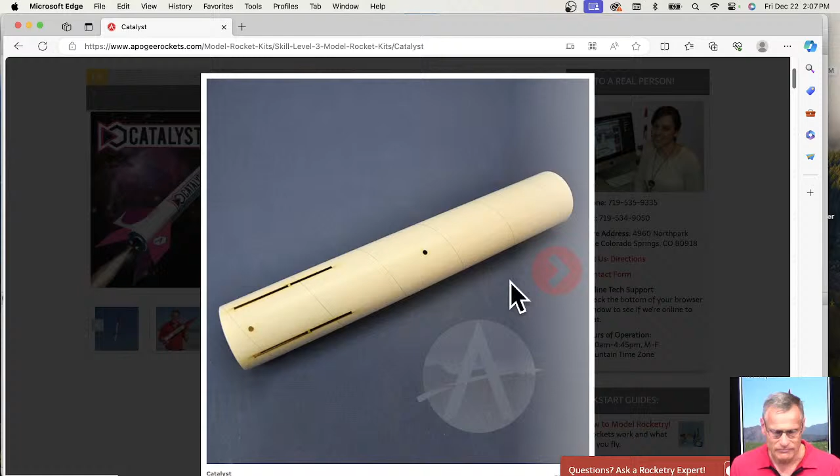So that's what it looks like when it's all packed up. There's the parachute, there's the tube, and you can see it's got a split fin tab. And you're probably wondering, can I do a split fin tab in RockSim? And the answer is no. That we've never thought about before.

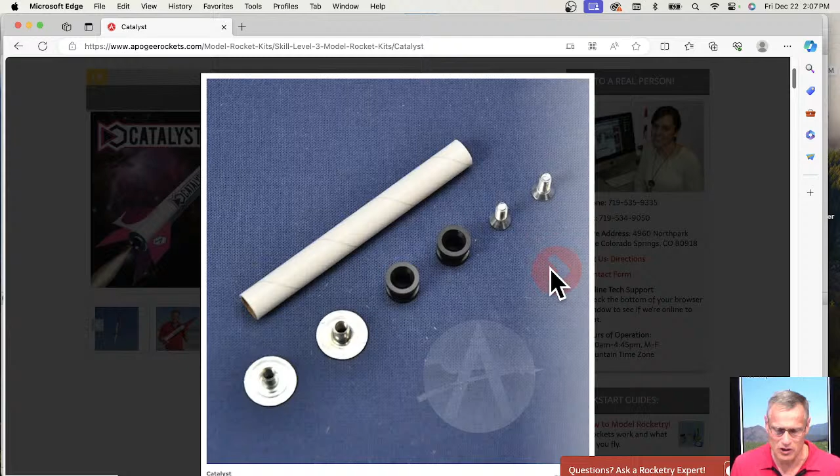It also does come with a launch lug in case you don't have a launch rail. You can fly it off of a 1/4-inch launch pad. There's the fins. They are plywood.

What else? There's a 3-inch diameter nose cone. There's the parachute and the parachute protector, the instructions, and there's the centering ring installation jig. And it also has vinyl decals. Yeah, so that's what the Catalyst looks like.

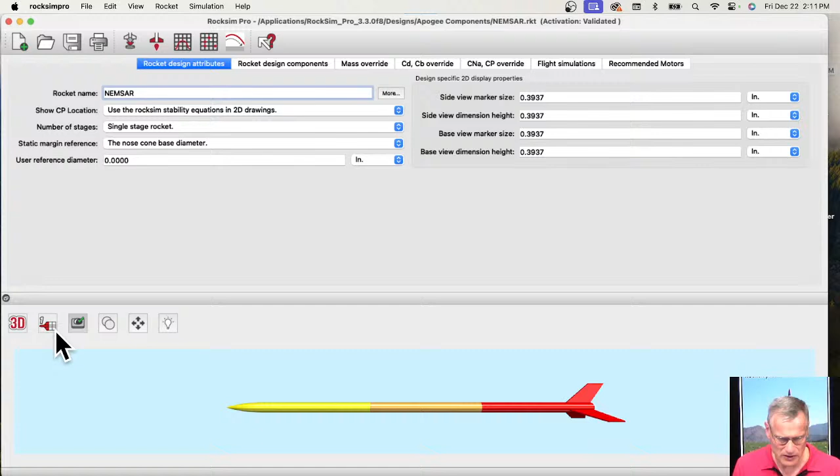Oops, what happened? Open. I must have clicked cancel or something. There it is. Okay, so here's the rocket. And if I click over here on this side, and if I go to a side view, I can get the diameter. So the diameter is 1.18 inches.

So his question is, will it allow me to indicate the upscale size? And the answer is yes. So let's do a 2x upscale. Basically we're going to double the size. So the diameter, we want to go from 1.18 inches to 2.36 inches, and that would be a 2x upscale.

To do that, it is really simple, although there are some caveats, and I'll explain those in just a second. So we're going to go to the rocket menu, and we'll come down here under scale, and we're going to choose by scale factor. Right now it's set to scale by 1, and we're just going to change that to a 2 and click OK. And boom, we are now at a 2x scale. So we went from 1.18 inches to 2.36 with just a click of a button.

Okay, so now let's talk about the caveats. So what didn't get scaled? Basically the outside of the rocket got scaled, but the inside parts might not have gotten scaled.

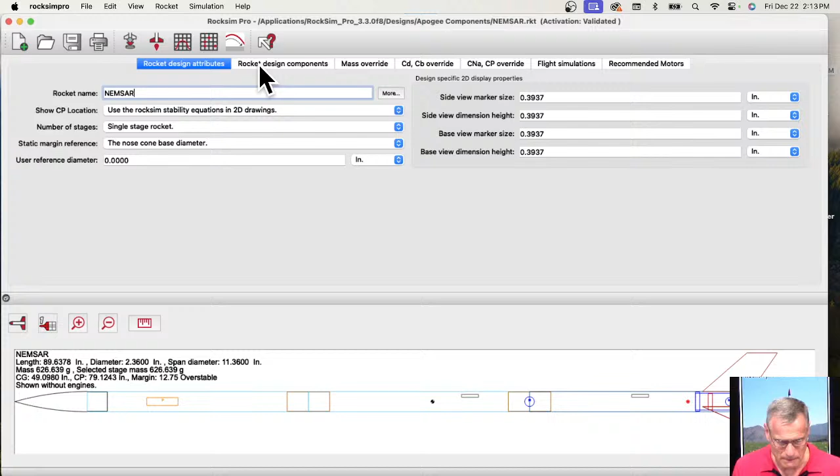Let's go to the design components and let me show you. Let's go to this coupler right here. This is a tube coupler, and previously it was a 29 millimeter diameter tube coupler.

So if we open that up, it did upscale the outside diameter and the inside diameter. But here's the issue with body tubes: when you go from like a 1x to a 2x in size, what doesn't usually happen is the wall thickness on the available tubes. Not in RockSim, but in real life, the available tubes don't increase as well.

So let me give you an example. Let's go back to the Apogee website, and let's go to shopping, to building supplies, to body tubes. There will be a chart down here if I scroll down far enough.

Let's go to 29 to 54. Okay, so we're going to start with a 29. This tube right here, I can tell you from experience, because I know the NEMSAR kit was based on this 29 millimeter body tube. So on this page, here is that 2913 body tube.

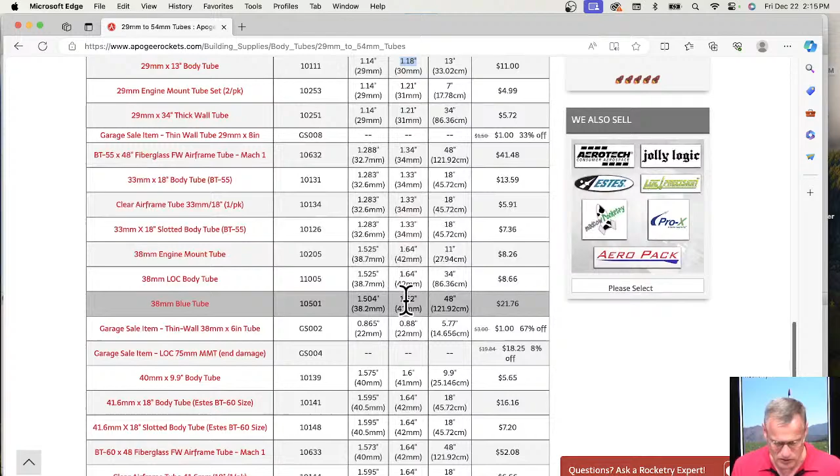I'm going to have to scroll down here, just looking down in this column. So the biggest one that I have, that's closest, is this one right here, at 2.26. But my inside diameter is 2.31.

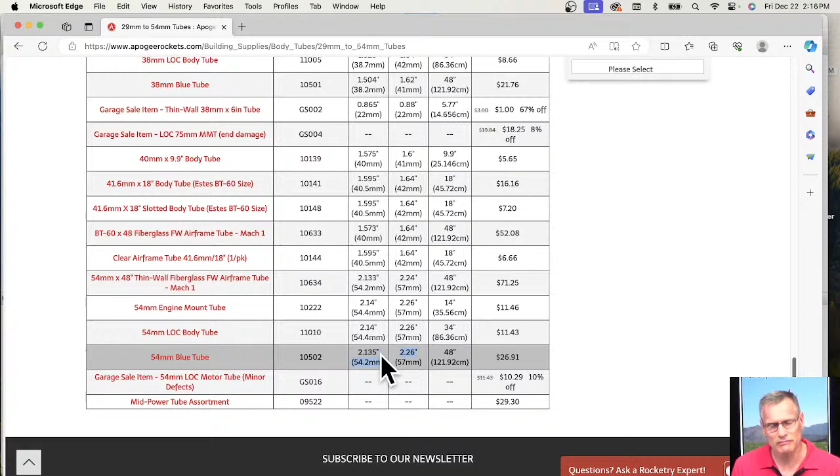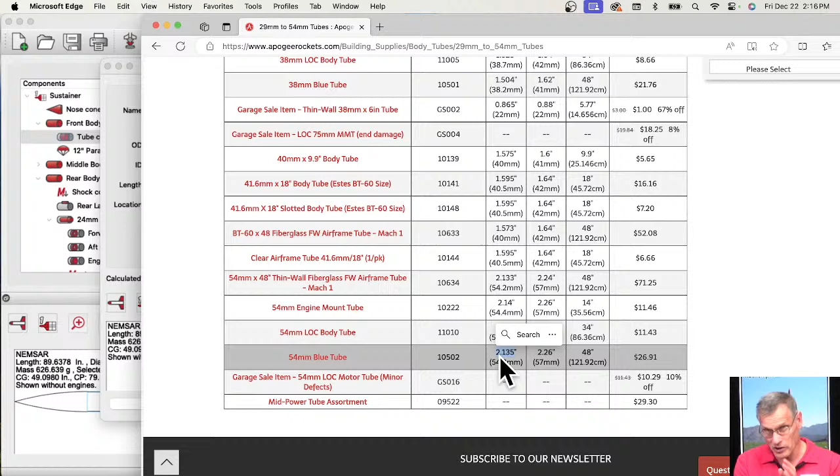And remember we said if we double the outside diameter of the tube coupler, which was, I forgot what it was, 2.26, will that fit in this available tube? So this is where it gets hard, because now you have to adjust tubes to what's available.

So when you scale, you're just scaling everything. But when you actually go to buy components, the components are not going to be at those exact diameters that you want. So basically what you have to do is come back to each component inside the rocket and tweak the diameters. It takes time, but you got to do it. There's really no way around it, because RockSim isn't smart enough to think about what components fit together.

This is where people always ask, is there a use for AI in rocketry? And this would be a really good place for AI: scaling rockets. Because when you scale up your rocket in RockSim, you then have to go buy the components, and you need everything to match. If there was an artificial intelligence, what it does is make decisions for you. You have a collection of tubes, and you want to scale up, and what we'd like the AI to do is pick all the right tubes for us. We're not there yet.

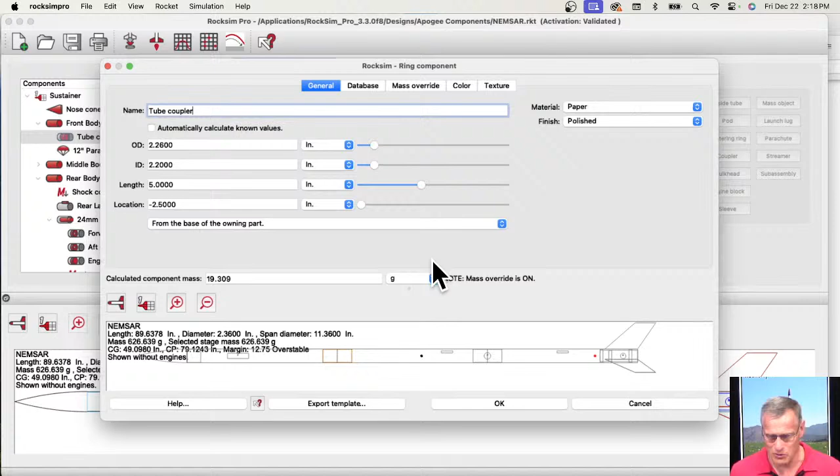And when is that going to be? I'm not an expert in artificial intelligence, so I couldn't tell you. So, save my changes, no. That answers Jim Hammond's question about how to upscale a rocket. It's easy to upscale, but you do have to come back and tweak some of the internal components.

Jim Hammond says he's retired, that's why he's here. Fat Bang says hello from Texas. John Sullivan is here, watching from Belleville, Illinois, which I think is near St. Louis, Missouri. Space is Cool says, I came back from school. Cool, welcome home.

Space is Cool says, I don't have my L1, so how can I use that? What do you mean by that? A 29 or 38 millimeter motor mount. So he's probably talking about our scale question: what is the motor mount in here?

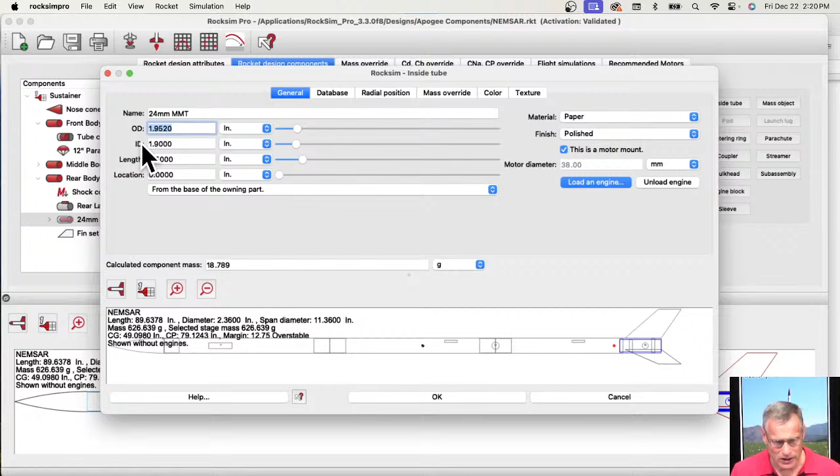So when we doubled the size of this motor mount, previously it was 24 millimeters. If I click on that tube and look at it, now we have a diameter of 1.95 inches. A 29 millimeter motor mount would be 1.14. So when it doubled the size of the motor mount from a 24, it almost went to 2 inches, so it's between a 38 and a 54 millimeter diameter motor mount.

Diameter, scroll down, and keep scrolling.

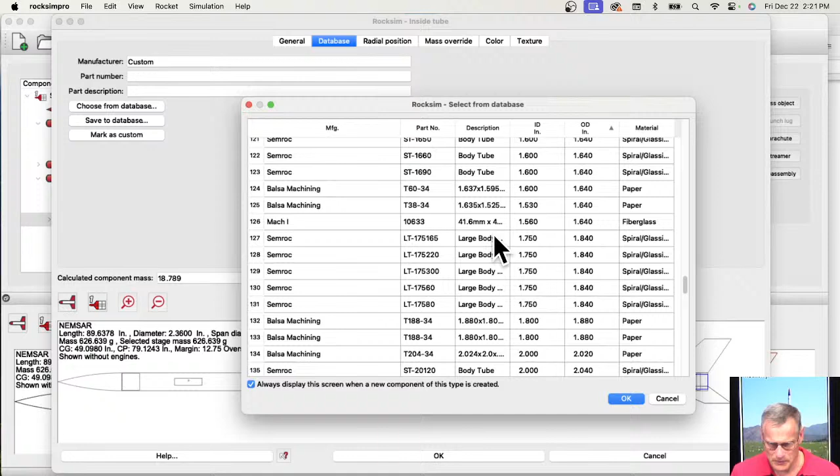See, here's a 54 millimeter diameter tube, and it has an outside diameter of 2.26. And the 38, here's a 38 motor mount tube, and it has an outside diameter of 1.64. So the one back here was 1.9 inches, which is greater than a 38, but less than the 54.

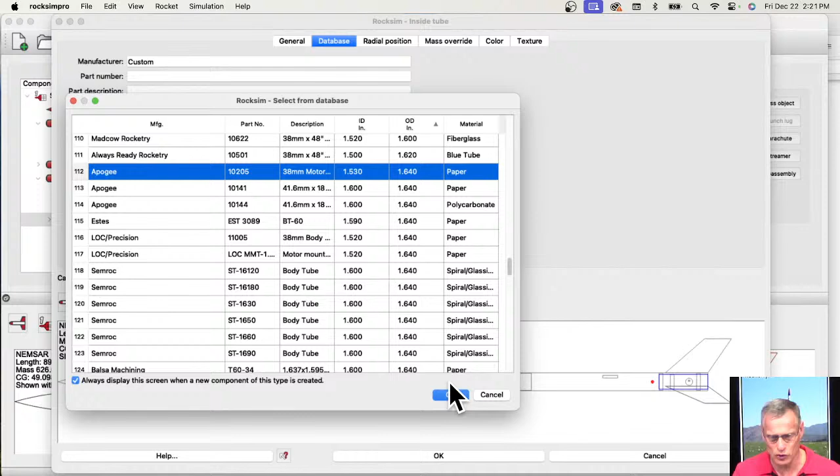So I would say we would probably turn this rocket into a 38 millimeter motor, and so I would select that. So that's the tube. Let's click OK. And you can see it threw it in there.

And if you look at the back, to zoom in, what I did, I just used the scroll wheel on my mouse. You can zoom in and out, and then click and drag so you can see this better.

So previously, I think this ring right there was an engine block, and this was a centering ring, and that's a centering ring. So we would need to move that centering ring forward and then just check that the inside diameter matches the outside diameter of this tube. And that's real easy to do.

So you just click OK, so it put in a new motor mount tube, and it's no longer a 24. Now it's a 38. So if I click the down caret right here, it will show me the components that are inside. So here's the forward centering ring.

And we want to check this box right here that says automatically calculate the known values. So we're going to click on that, and that will, if I look at it, put it on the inside. I wanted to put it on the outside.

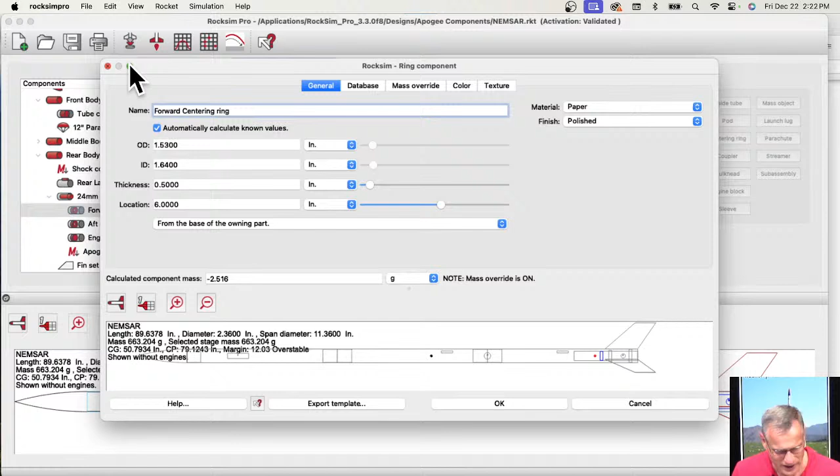That's interesting. I would probably have to delete that centering ring and add it back. So let's do that, because it's on the inside of the tube and we need it to be on the outside.

So I'm going to highlight that tube and then hit delete. It's going to ask you, do I want to delete it? So I'm going to say yes. And okay, so that was the motor mount tube.

I can either put the new centering ring on this body tube right here, which I probably should do, or the motor mount tube. But if I attach it to that motor mount tube, it might put it on the inside again. So let's put it on the outside and come here to centering ring.

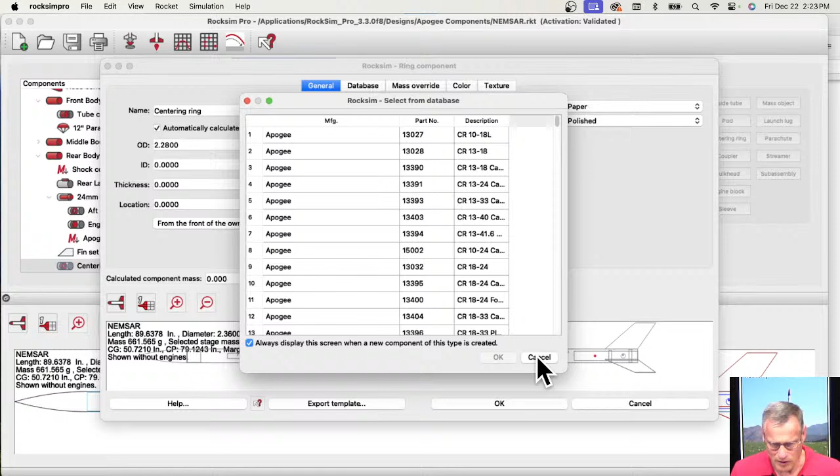And I'm going to ignore the database. So here's our centering ring, and you can see this blue line right here. That's where the centering ring is right now.

I need to give it some thickness so you can see it, so let's call it 0.25 inches. So there it is, I made it larger. And I need to slide it back here, so I'm just going to change the location.

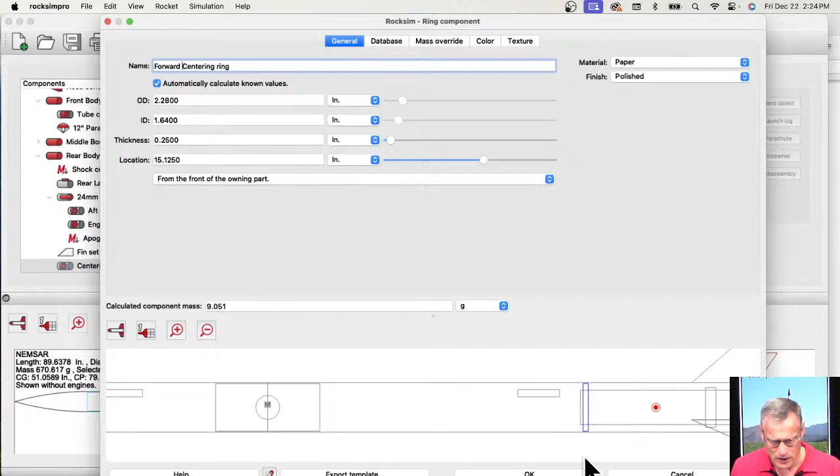So now watch this inside diameter right here as I slide this ring over the top of the tube. So I'm getting close, boom - so it automatically adjusted that centering ring for me, so I didn't have to adjust it. So then I'm going to say this is the forward centering ring. Click OK. So now we got one ring.

I'm going to have to do the same thing on this back one. So let's delete it. I highlight it, then I right click on it, hit delete. It should go away.

And I'm going to just take this centering ring right here and duplicate it. So to duplicate it, again, right click and do a copy, and then come up here to the body tube and paste. And it pasted it right on top.

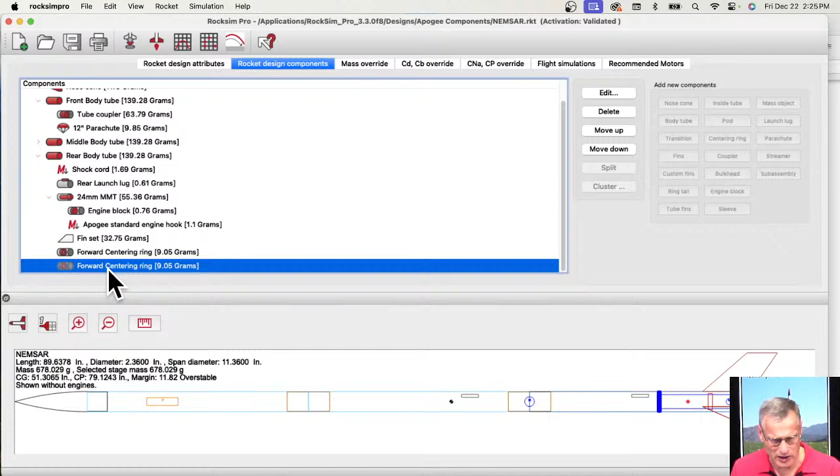So now I need to edit that part. I'm going to call this the aft ring, and the only thing I'm going to do is just keep sliding it back to the back end of the tube, right about maybe there. So you can see it right there at the back end of the tube.

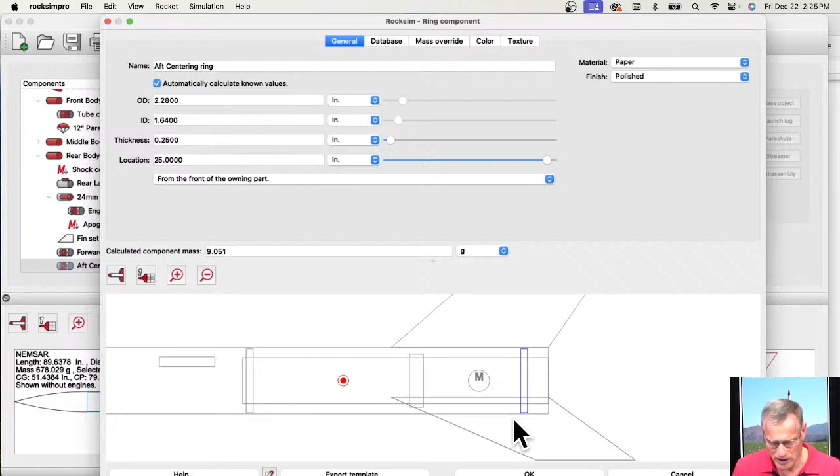Now this right here was an engine block, and since this is a high power rocket, we're probably not going to need an engine block. So I'm just going to delete that entirely. Highlight it, then come down here and delete, or you can do a cut and say yes.

Okay, so that's how I did it. Just tweaking the components to what is actually available. Although in real life, this 2-inch or 2.3-inch diameter tube is not really available, so these are all custom parts. Okay, so I got off track.

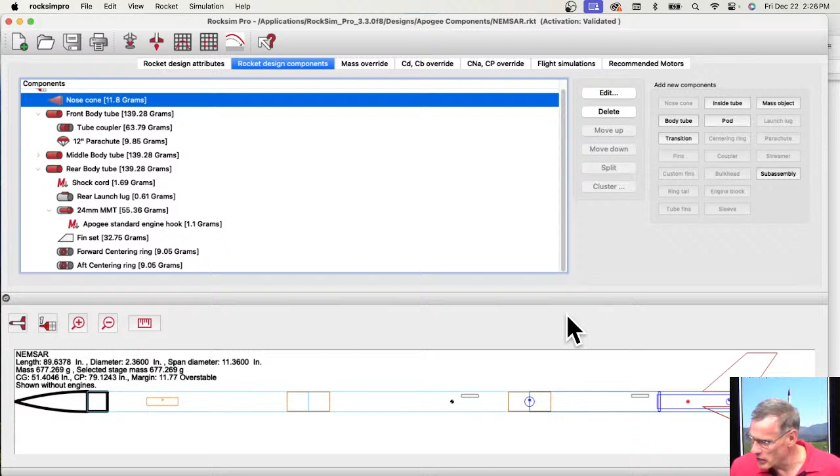Jeff Gortowski says hi from waterlogged Los Angeles. Yeah, I hear you guys are getting some water there. I hope it washes out to the sea really quick, and maybe it washes out all the debris too.

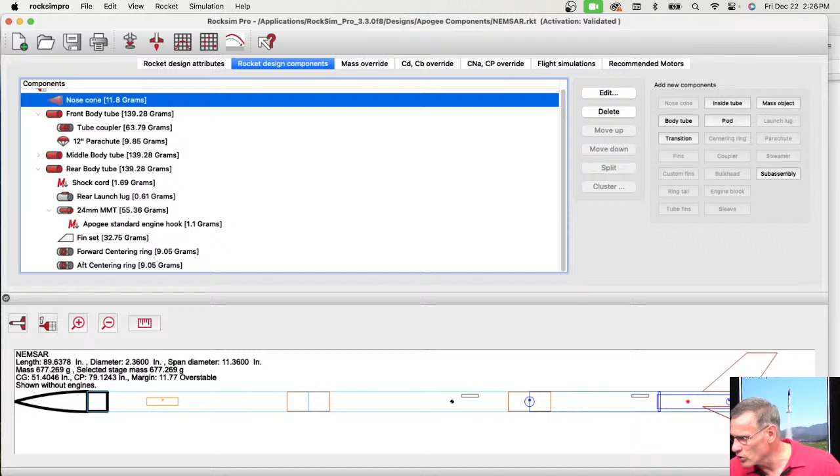Chuck Garn asks, will nose weight be required for the catalyst? The answer is no, no nose weight is required, even with an H motor. That rocket has a really long nose cone made out of plastic, so it's a little bit heavier, and that will move the center of gravity far enough forward where you don't need it. I think I have a catalyst RockSim file, so I'm going to go open that.

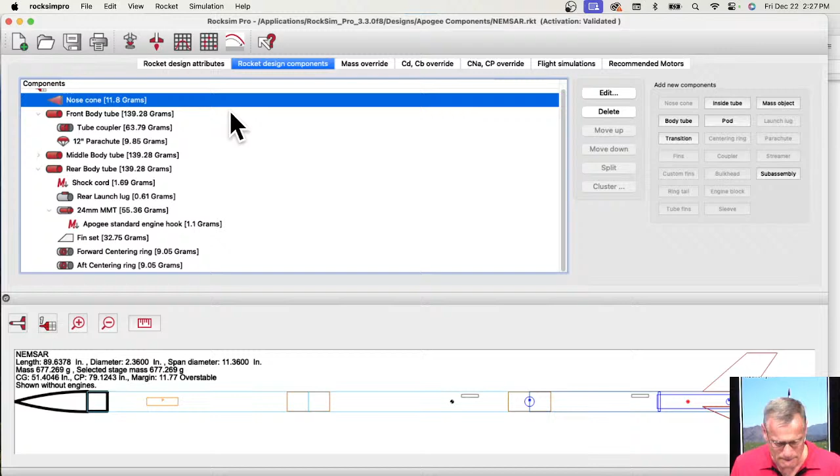File, open. What did I do with that? I'm looking in the wrong spot. RockSim Designs, and date modified, there it is, catalyst. Open. Save my changes? No. Hopefully it opens, this one has some textures on it, and that can make it take a little longer to load.

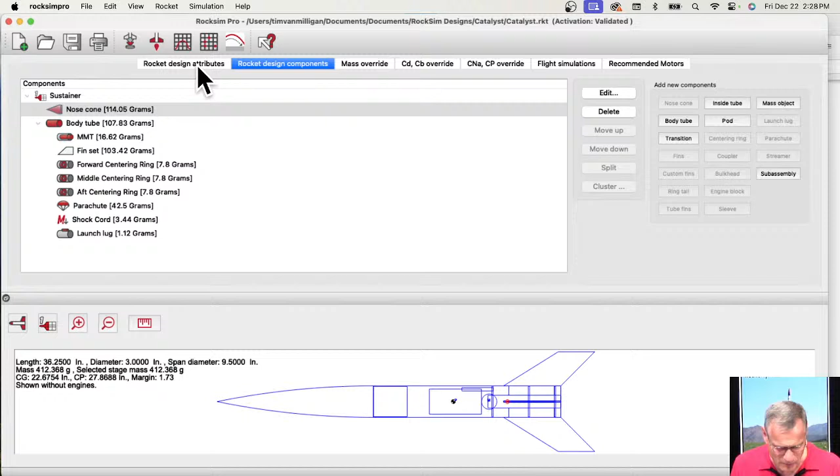In fact, my textures I can see already are backwards. So this is the RockSim file for the catalyst. My fin textures, the decals, are backwards. But I wanted to show you, this doesn't have a name, there we go, add the name. You can see here's our center of gravity, and here's the center of pressure.

Let's load in a big rocket motor, choose an engine. Let's go like an H135, that's kind of a mid-range. Let's make it a 14, it has an overhang of 0.5 inches, click OK. Click OK. So you can see here's my center of gravity, here's my center of pressure, and there's still no nose weight up here.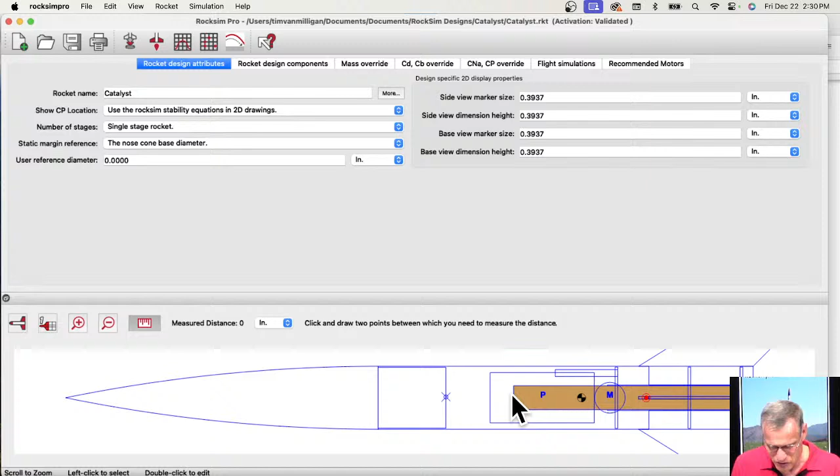But the problem is we've only got this much room right here from the front of the motor to the back of the nose cone for our parachute. And I'm using RockSim Pro, which has a measure feature, so I can click from here to here, and it tells me I got 3.25 inches for my parachute. And that's, you're probably going to scorch your parachute.

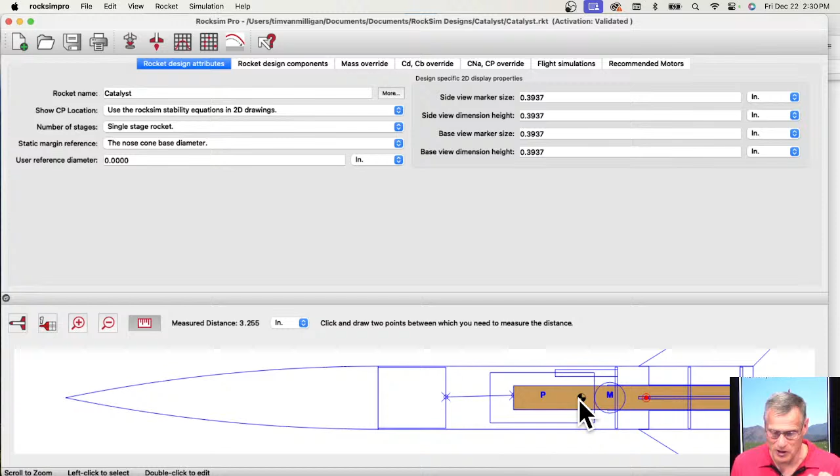Although you probably could wrap it around the outside of the motor. But even with a long motor, our center of gravity is still okay on the catalyst because it's got this big heavy nose cone, and it's short, so those long motors are actually going to move the center of gravity forward, which makes it more stable, because we have part of the motor in here that is in front of the center of gravity. Okay, so that's a good question.

Carlos McCauley is here from Palm Bay, Florida. That used to be my old stomping grounds when I lived in Cape Canaveral. Didn't know Palm Bay is where FIT is, right? I went to FIT, but not to that campus.

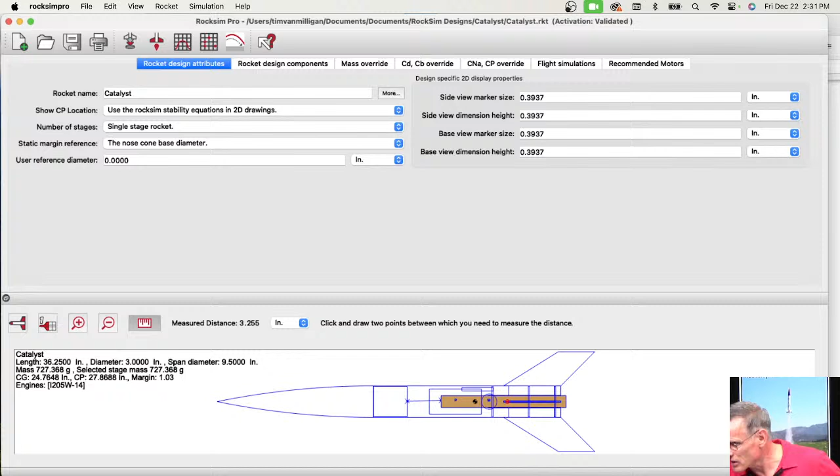Maximo says, can you make the Hermes HLV on the sim, and the Hermes, it's a cargo? Okay, so let's open up a Hermes. And let me go back to here. So here's a Hermes. This one also has a lot of textures on it, so it's going to take a little bit longer to open. Save my changes? No.

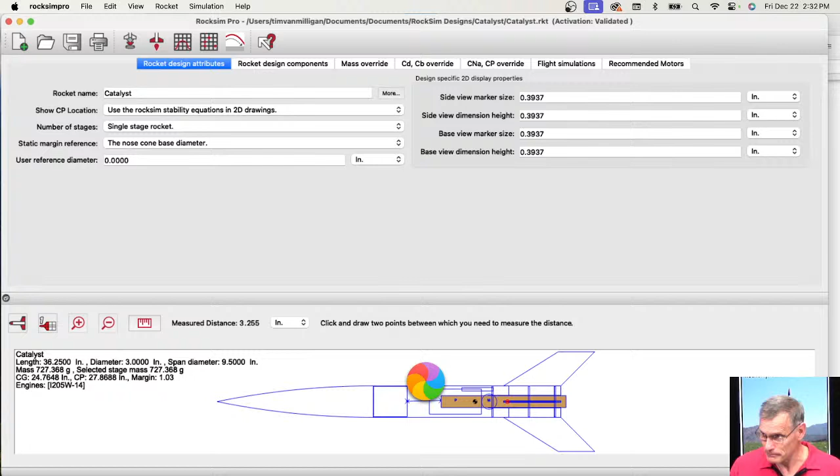My computer right now, because I'm running RockSim and I'm running the streaming software, it's bogging down, I can hear the fan going. Okay, so this is the Hermes. Come on, I'm waiting for it to catch up, there it is. Okay.

So the question is, can you make the Hermes HLV on the sim, and the Hermes it's a cargo? Well, I'm not sure what he means by making it a cargo, because it's already set up, the rocket is already set up with a payload bay here in the front. So let me go to the side view. This right here, I can put cargo inside of here.

So if I zoom in, I can measure again, from here to here, come on. Click on 2 points, here to here. Okay, what's going on? Why is it not letting me measure? It's kind of stuck.

Yeah, okay then, I should be able to click. Oh boy, it looks like my fins went crazy back here. But anyway, this is a BT60 tube, so that's 1.63 inches that way. So I'm thinking that's probably about 7 inches from here to here that I have room to put cargo, and cargo could be anything.

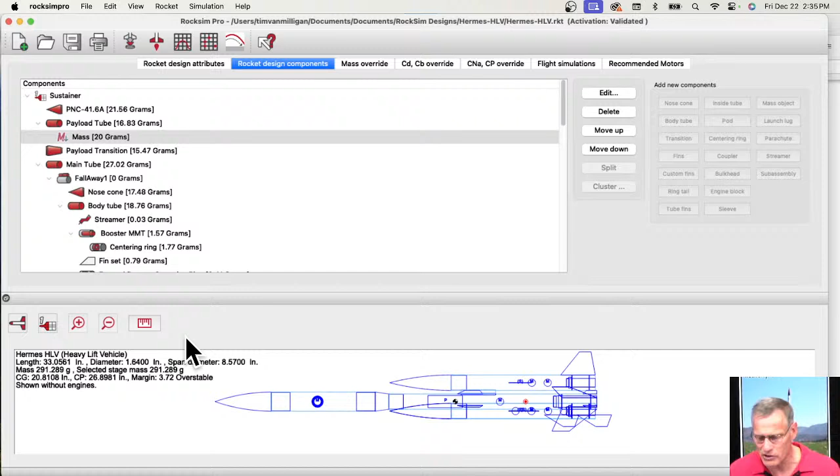So when you scale a rocket up, everything goes up by 2x. And that's the advantage of that feature.

Let me try a different design here that's simpler. Something simple, something simple. I'm going to try this one, two-stager Loadstar.

Save my changes? No. Okay, so right now, if I scale this rocket right here, we've got a diameter of 1.32, and also look at the span diameter. The span diameter is 8.73 inches. So that's from here.

That's kind of like looking at it at the bottom, as if it was a circle drawn around the fins. That would be the diameter.

So when you scale the rocket, the length is going to double, the diameter is going to double, and the span diameter is going to double.

So let's do that again. Rocket scale factor by factor of 2. Click OK, and boom, you see that the span diameter also doubled. So basically, the fins doubled in size, and that's the way you would expect it to work.

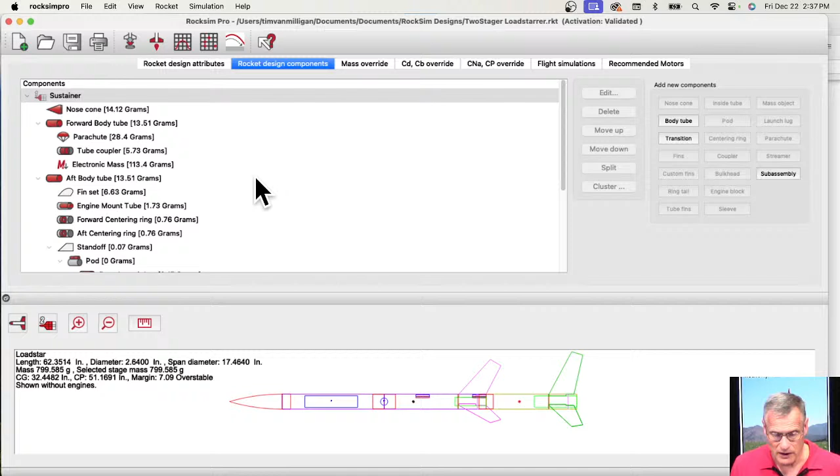Now, if you can actually scale the fins as well. Let's open a new design again. I want something that's fairly small.

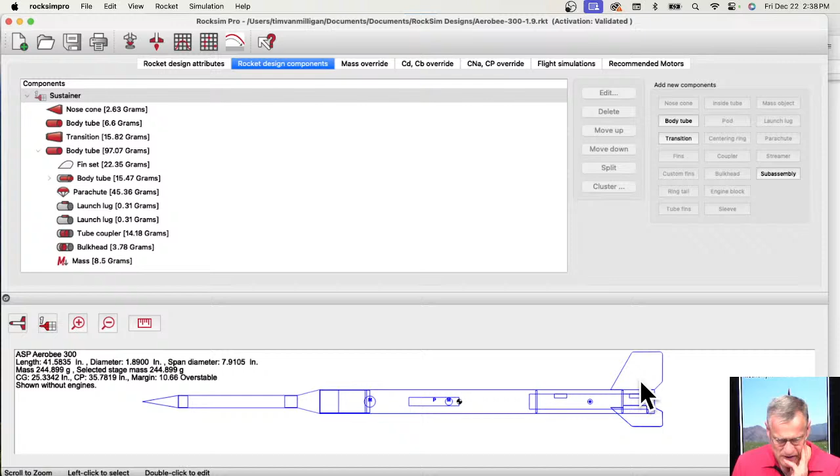Let's go with this Aerobee 300, 1.9 inch. Okay, so here's these fins, and they have a span diameter of 7.9 inches.

There's another feature in RockSim. So I can go to the fins, and I think if I go to plan points, this button right here.

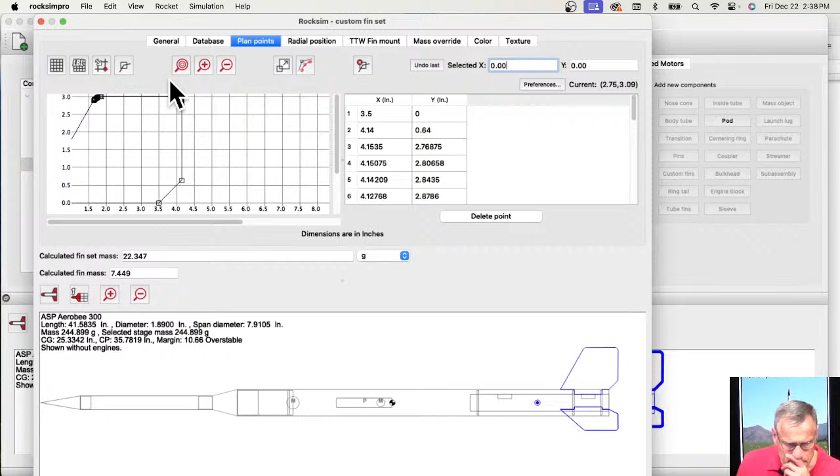You can scale the fins, and I can scale them by a factor of 2. So this is how big they are now, and if I scale them up by 2 and click OK, it's thinking. You can see now they're much bigger. Basically, it just took everything and jumped it up by a factor of 2.

Using this feature right here isn't used very often. In fact, I forget where it is, because it's rare that you're going to scale your fins up like that. Typically, you just scale the whole rocket up, and that's the easiest and quickest way to do things.

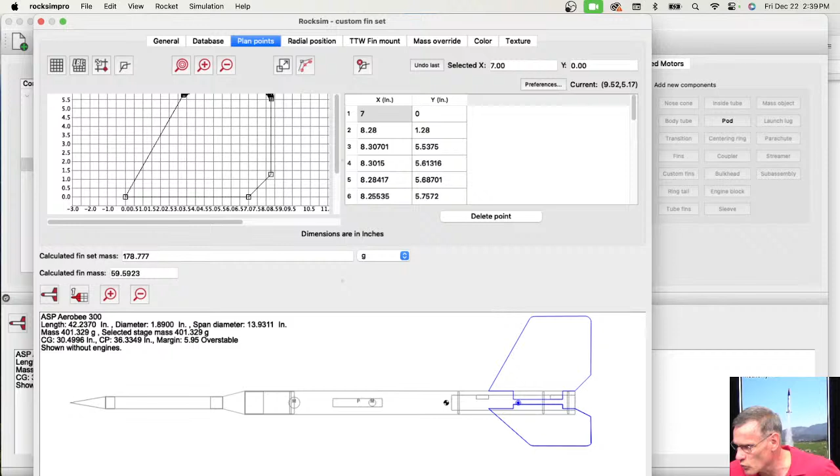Okay. Stuart LaFon says, Hi Tim from Vermont, Merry Christmas. Well, Merry Christmas, Stuart. He says, thinking about getting a LOC Precision Minie Magg. RockSim shows a mass weight in the nose cone in front, but the kit doesn't come with nose weight. Just wondering why it shows that.

Let's find out. So let's go File, Open. We're going to look for the LOC Minie Magg. Let me go to my application folder. Where are you, RockSim? There we go. And I want to go to the designs folder, and then in here we're going to the LOC folder. There it is, LOC Precision. And now we're looking for the Minie Magg. There it is, PK-68 Minie Magg.

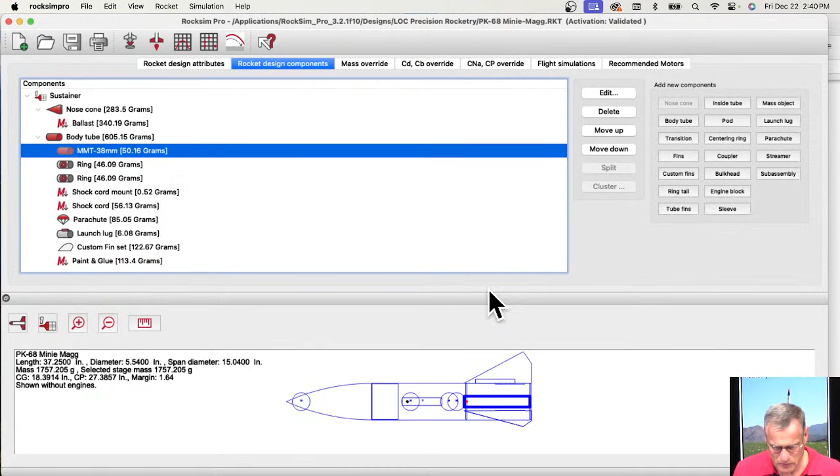Save my changes? No. Okay, so the kit, he says, the real kit doesn't come with nose weight. So he's wondering why this has a ballast of 340 grams. So let's put in a rocket motor and see if we actually need that or not.

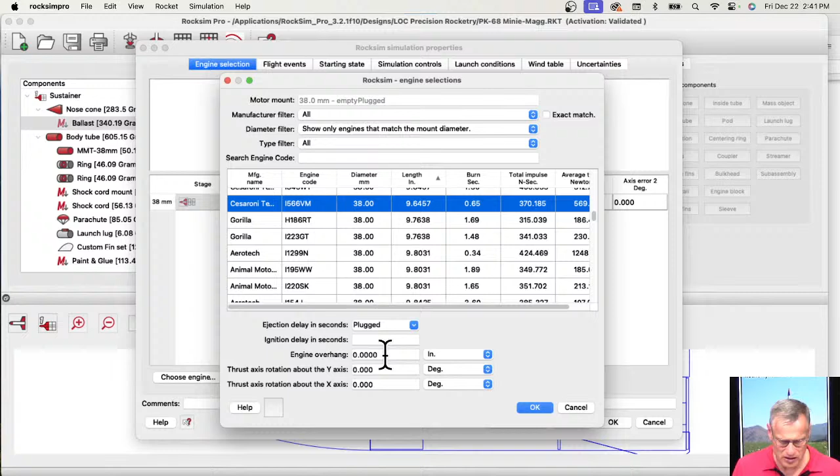So I'm going to choose an engine, and it says it's 38 millimeter. Let's choose something, we'll choose an I566 VMAX and give it an engine overhang of 0.5 inches. Click OK. So there it is, and I'm going to click OK here.

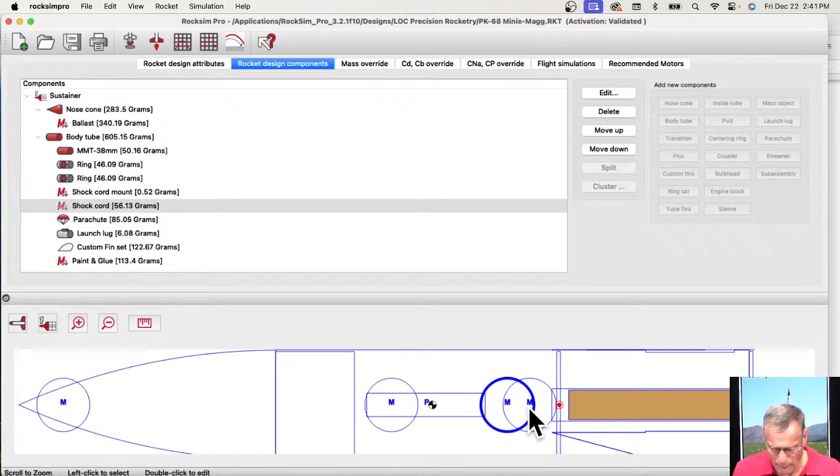And so here's the Minie Magg, and these are mass objects. So this one is the ballast. This one right here is paint and glue. That one is the shock cord. And there's one more, the shock cord mount is that one.

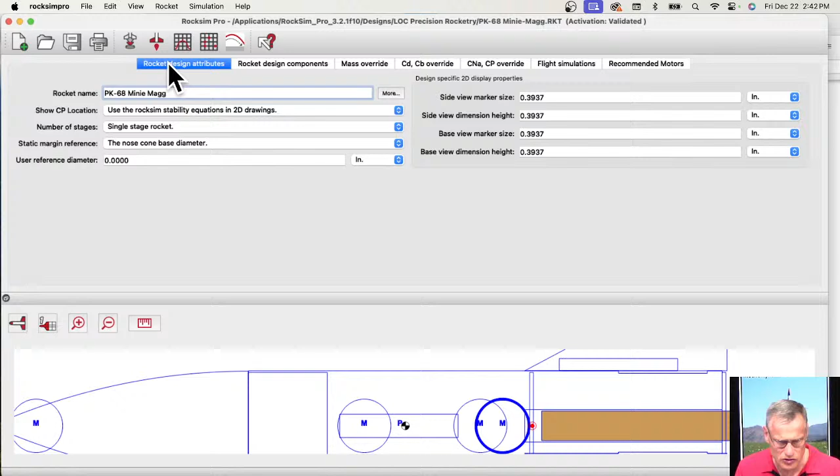Okay, but I wanted to see where the center of gravity is and center of pressure. So here's center of gravity, and I can make that center of gravity symbol bigger. Just go to the rocket design attributes, go to the side view marker size.

You can change it there. So I'm going to make it 1 inch, and that will make it bigger. And then hit tab. See, now it's bigger. I can see it a little bit easier.

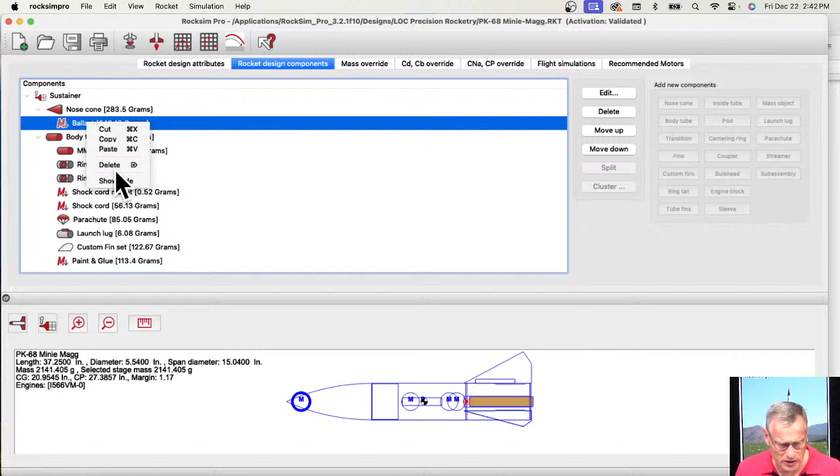So let's take that nose weight and let's remove it. We're going to delete it. Again, I just did a right click and used that. There's a drop down menu and then select delete. I'm going to say yes.

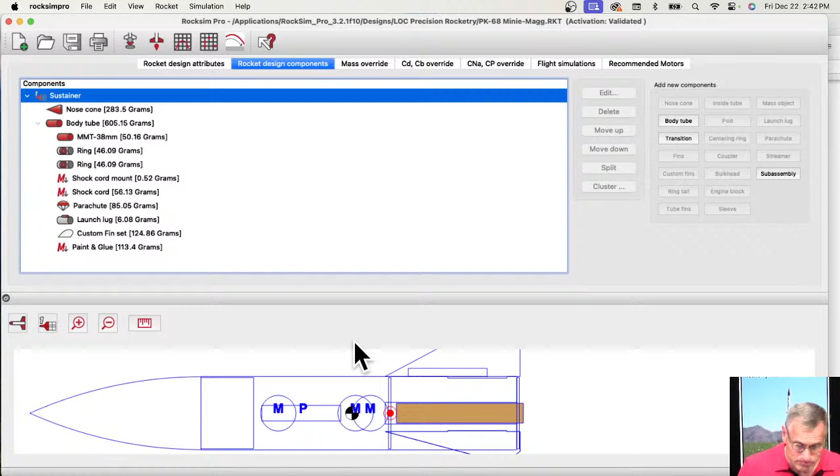Okay, so by taking out the nose weight, I'm still stable. So I think you could probably fly it without any of the ballast in there. It certainly will be more stable if it has ballast.

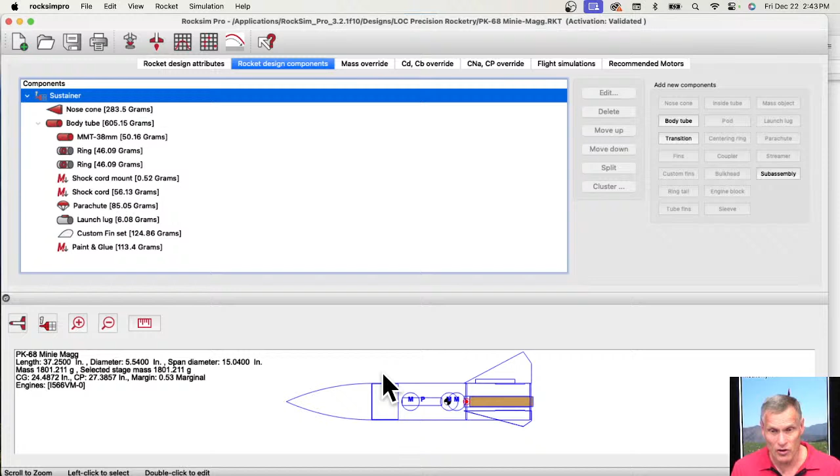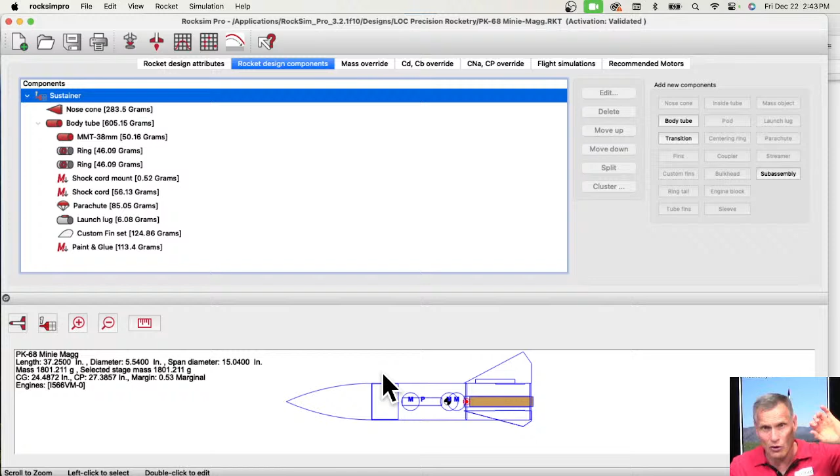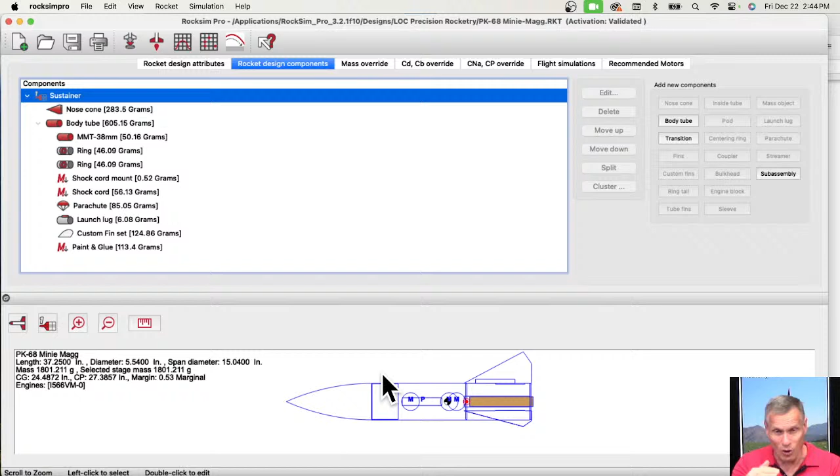Somebody in our club flew one of these kits, and they had a lot of ballast in the nose cone. The downside of putting ballast in the nose cone is it makes the nose cone really heavy. What happened on their particular flight, I was the RSO, and the rocket separated, and there was so much nose weight in the nose cone that when it separated, it snapped the shock cord. So now the nose cone is free, and it had so much nose weight in it, it came down so fast. People didn't see it, and I'm pointing up and I'm screaming at people, and it hit the ground and it dug a hole probably that deep. And yeah, somebody could have got hurt. So I am not a huge fan of nose weight for reasons of safety.

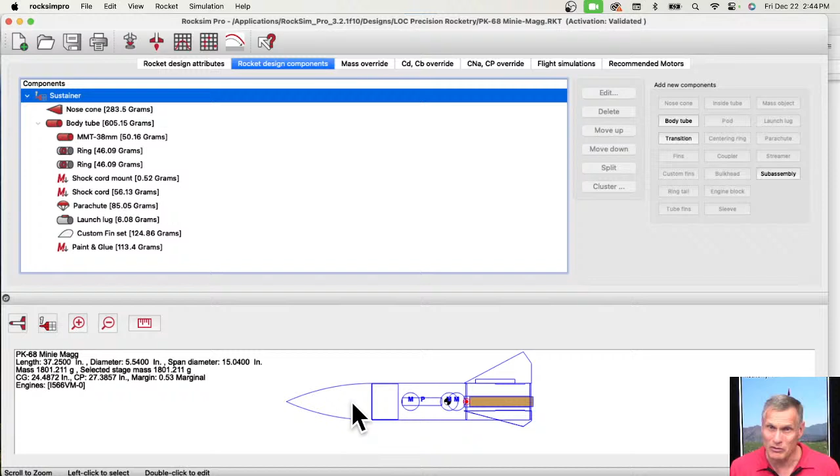It's better to make the rocket longer than to add nose weight, because you can make it longer and keep the rocket lighter in weight and get the same stability. So if you have a choice of adding nose weight or making the rocket longer, it's always better to make it longer for the reason of safety. So that's my design tip today.

Terry Wheelock is here. Terry Wheelock says, I put up a video short of me Christmas rocket on my channel. He says, do I win? Well, I gotta see it, Terry. So put the link into the chat and we'll take a look at it.

Okay, we'll go back. Maximo Delgado says, I got a Star Wars racer on Shell gasoline, and it's Mandalorian. The employees said that I got it, it's the last one, but tomorrow I can buy the others. Cool, I didn't realize those were available.

Marcel says, I sent my Christmas rocket file to Brandon with questions about 3D color and missing motors in my database. Missing motors in your database? Yeah, we could talk about that.

Jim Hammond says, use the Estes doorknob for a 2x upgrade example. Thanks. Okay, let's see if we got the Estes doorknob. Oh, cool, it's in there.

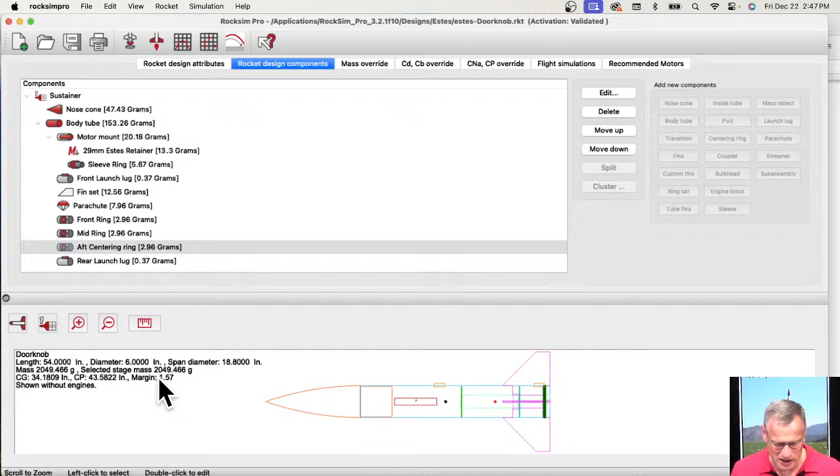Click OK. So the rocket image doesn't really change, but what we did see was that the center of gravity and the center of pressure symbols got smaller in proportion because those are tied to a specific dimension. But the diameter of the rocket just upscaled from 3 to 6, and the span diameter went to 18, and now the length is 54 inches.

So if you are going to build this rocket, you have to go in and tweak some of the components. So start with the motor mount. If I open that up, it's 2.42, which is not a common motor mount diameter size. So we'll go to the database and choose from the database, find a 38 millimeter motor mount tube, click OK.

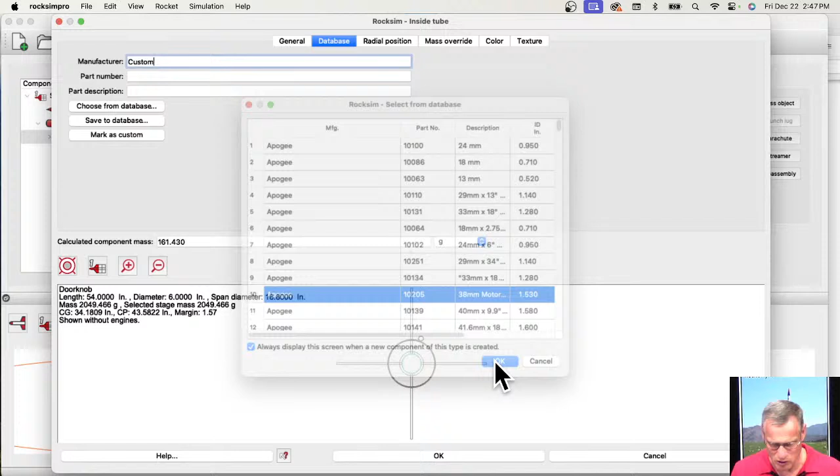You can see it got a lot smaller back there. Let's go to a side view. So it's this green one right there. And you can see my fin tabs aren't reaching the motor tube, so we'll have to tweak that as well. But my centering rings, this one right there was probably an internal ring. So let's click OK for that.

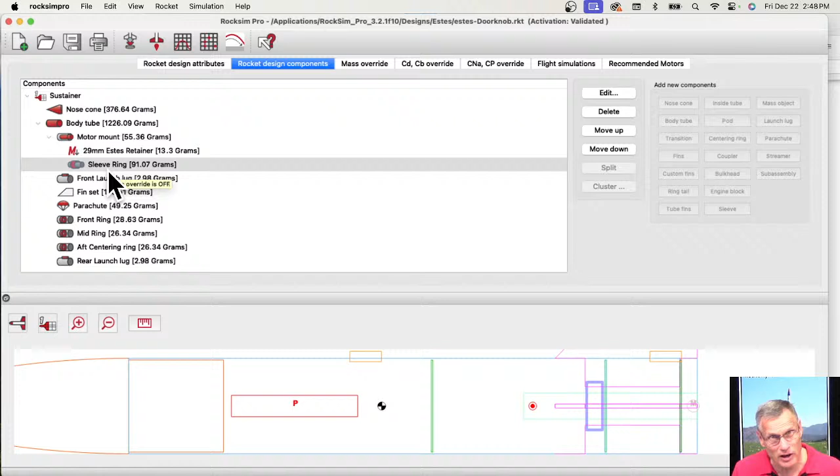Let's click on that. Ooh, that's a sleeve ring. I'm just trying to think, in the doorknob, why do we need a sleeve ring? I don't know. So we'll delete it. I'm going to hit delete. We don't need that in our upscale.

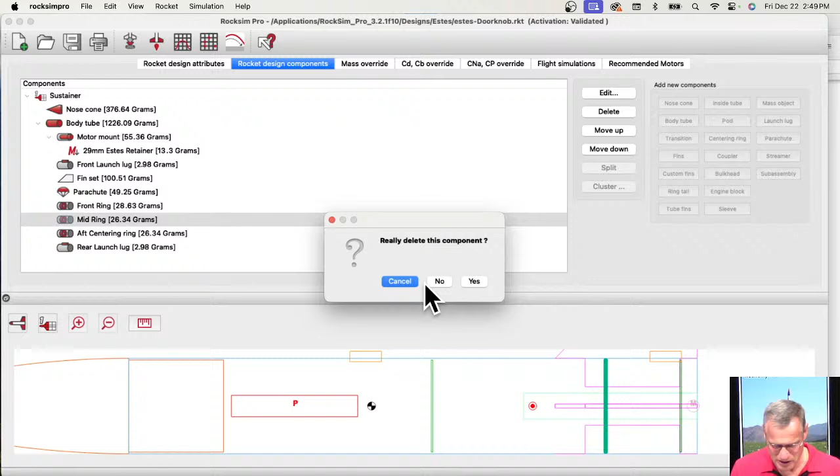So that one's gone. And now this centering ring here, what was this one right here? A front centering ring. Oh, yeah, we're probably not going to need that front ring or the mid ring, one of the two. So I'll delete the mid ring. Delete it. Yes. Okay, so we're going to take the front ring right here.

And we're going to slide this backwards. Oops. Right there, that's a good position for it. And you saw that the inside diameter changed.

My thickness is probably going to make this—this is a 6-inch diameter rocket, so we're probably going to need like 1/4-inch plywood here, where it's no longer cardboard. Now we want to go to plywood. And click OK. We got to do the same thing for the back ring.

Its location was probably okay, but it needs to be plywood, 0.25 inches. So there's the back ring. Click OK.

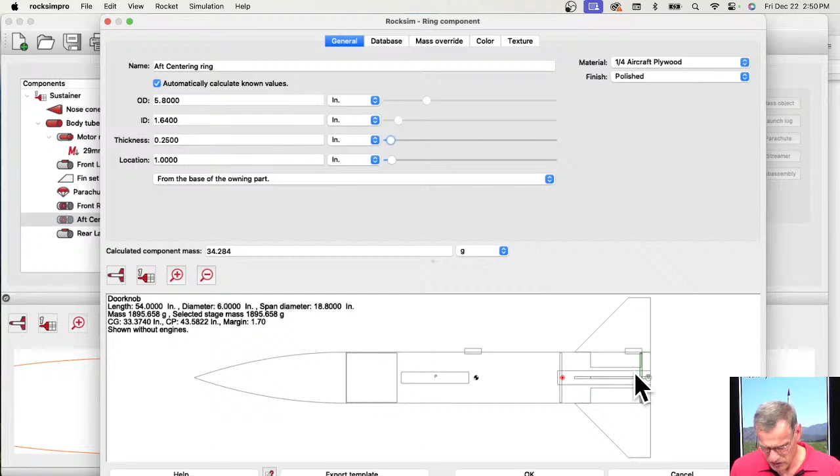Okay, so now we need to adjust the fins because our fin tabs aren't hitting the tube. So we're going to go to the fins. Here's our fins, let me make this bigger. We'll go to the through the wall fin mount, click on that, and zoom in a little bit. We see this pink line here we need to adjust. The first thing is to get it down to the tube. That's easy, you just click the button that says calculate the fin tab depth, and then put it right against the tube.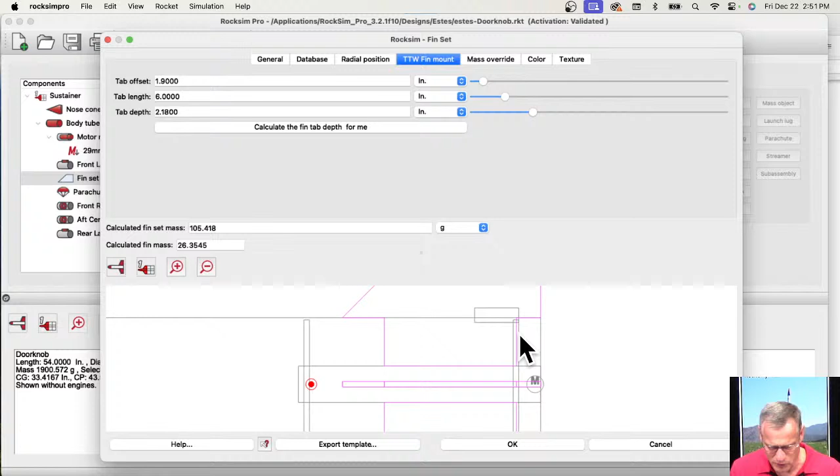Next, we've got a little bit of interference here with this back edge of the fin tab and the centering ring. We need to move that edge just a little bit forward, and I think I can change that with the length, make the length shorter. Okay, so it's close, let's call it 2.17. You can see it's hanging over a little bit. Let's call it 2.1 - oops, that was the wrong thing to do. It's not that one, it's this one. Okay, 5.8 inches, so that makes it work. So I've adjusted my fins.

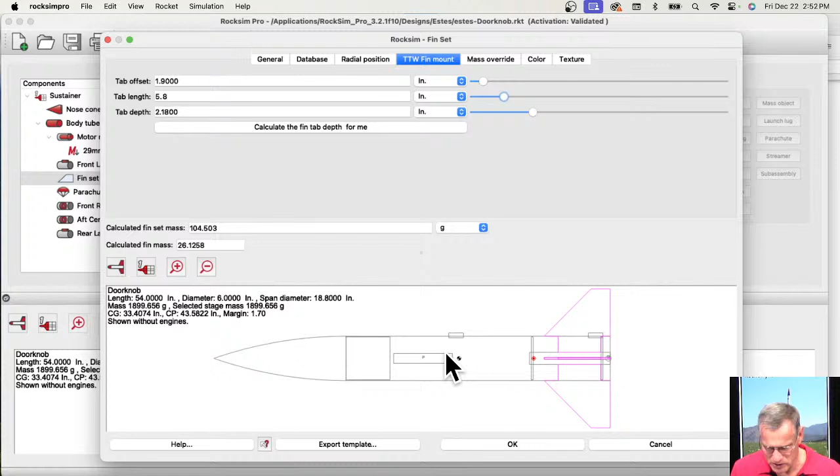And you probably change these launch lugs to rail buttons. And the parachute, I'm not sure what size parachute this is anymore. If I open it up, it was 24, now it's a 48. 48 probably be okay, so we'll just leave that alone. We get a lot of questions today about scaling, but that's how fast we went and scaled this rocket, the Estes doorknob. It doesn't take long, but you do have to tweak those inside components.

Alfred Indy is here, and he says Terry Willock used his doorknob for an egg lofting contest. He ended up with poached eggs. Tasty, says Terry.

Chuck Garn says, will it be possible in future versions of RockSim that when you are designing a rocket and you get to the fins, will there be an option to choose proportionally sized fins for the size of the rocket? Well, that feature is already in RockSim right now. It bases the proportion, when you say proportional, on a formula RockSim uses.

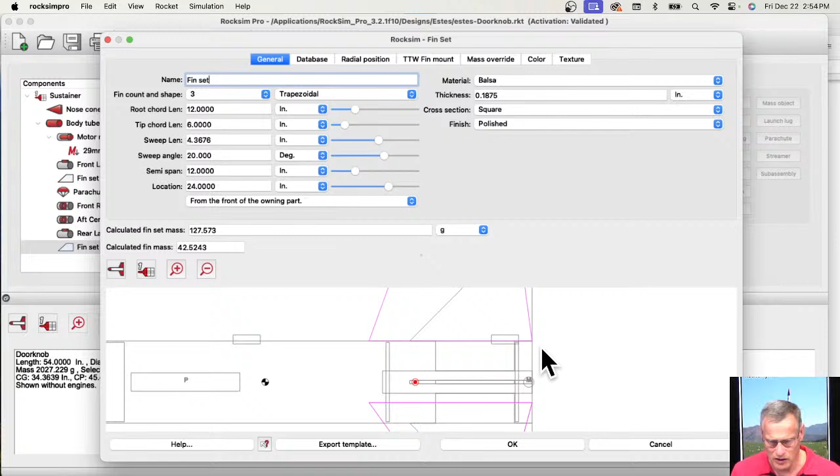If I just throw a fin on here, so here's this body tube, and we're going to leave these other fins here as an example, because this is probably a good size fin for this rocket. But if I add a new fin on here, I select the tube and then come over here to fins and add a fin. What it does is looks in the database - I'm going to say ignore that. And you can see this new pink one. Let me change the color.

Let's change it to purple. We need something different, how about dark purple? Okay, so here is the new fin, here is the old fin. I'll just slide this fin a little bit forward so that they're not overlapping each other. So this is the old fin, this is the new fin. So RockSim, when you start a design, it's going to throw a fin on the rocket that it's basically going to try to make the rocket stable. So it's a little bit oversized, but it is stable.

So there's that feature. So what I'm saying is we don't really need to add a new feature because it's already there.

And then we have Hugo BG06. We've got like 5 minutes left. I was waiting for Terry to put in his RockSim design video, a link to it. I think we got most of the questions. If I missed your question, type it in real quick. We still have time. Although, did my video freeze? I'm not sure.

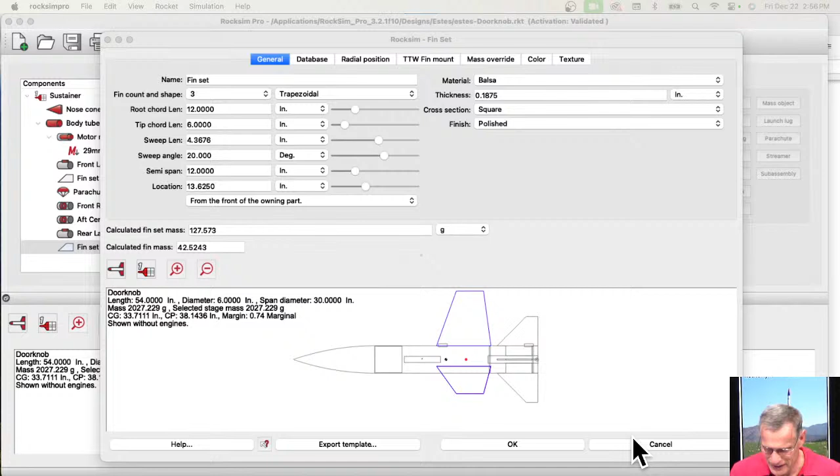I got an error that says YouTube is not receiving enough video to maintain smooth streaming. I'm on Ethernet, I don't know. YouTube, I didn't do it. Save your changes? No. Okay, well...

Marcel says, I am having trouble with 3D color. And Chuck says, oh, I didn't realize that the feature was there.

Alfred Indy says the Catalyst did 3,838 feet on an H135.

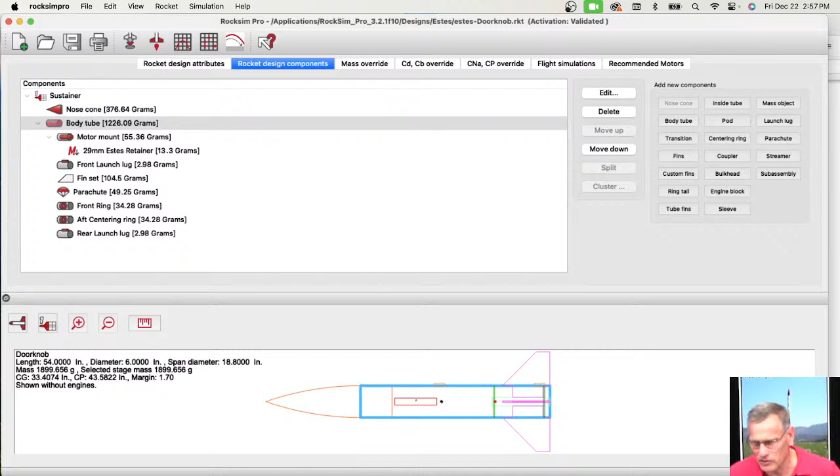Carlos McCauley asks, can RockSim do geometric airframes? Well, RockSim is limited to airframes that are circular. So if that answers your question, I hope it does. It can be any shape you want as long as it's a cylinder.

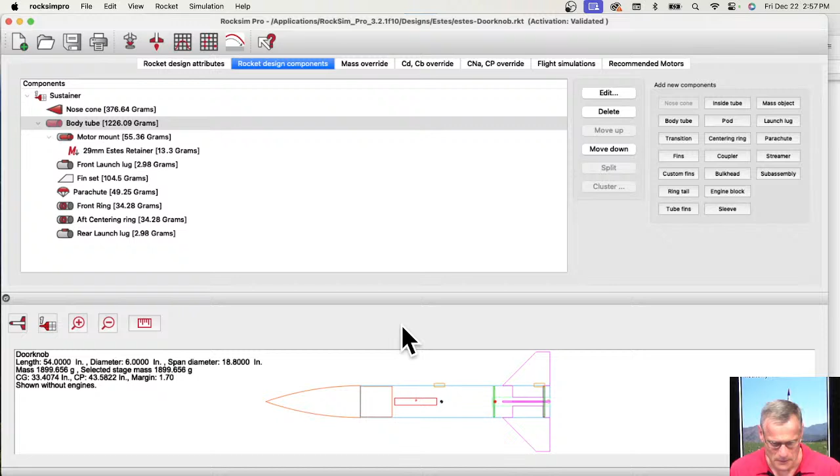Okay, so Marcel is having problems with 3D color. Let me go to 3D. So this doorknob rocket is white with an orange nose cone.

If I wanted to make the fins a different color, you go to the fins or whatever component you want to change colors, and then you come up to the color tab, and there's two colors. There's a 2D color, which is what we're seeing here, and then there's the 3D color. So this side is 2D, this side is 3D, and the diffuse color is the basic color. So if I made it green and click OK, now in 3D it should be green.

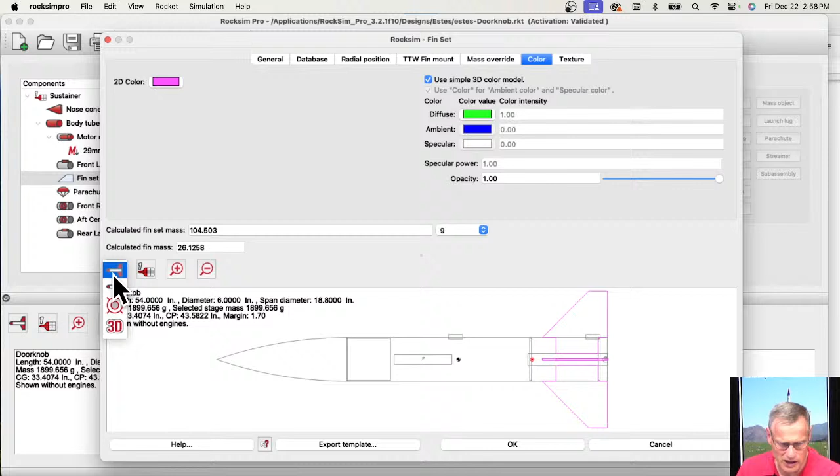So right now I'm looking at 2D. So to make it 3D, come over here, slide down to 3D. And so now my color, this green, matches that color green.

I would just leave it as simple 3D color. If you start changing things, see, when I changed it, it kind of had the light hitting the fin more blue, and so the color shifted a little bit, from this bright green to a darker green.

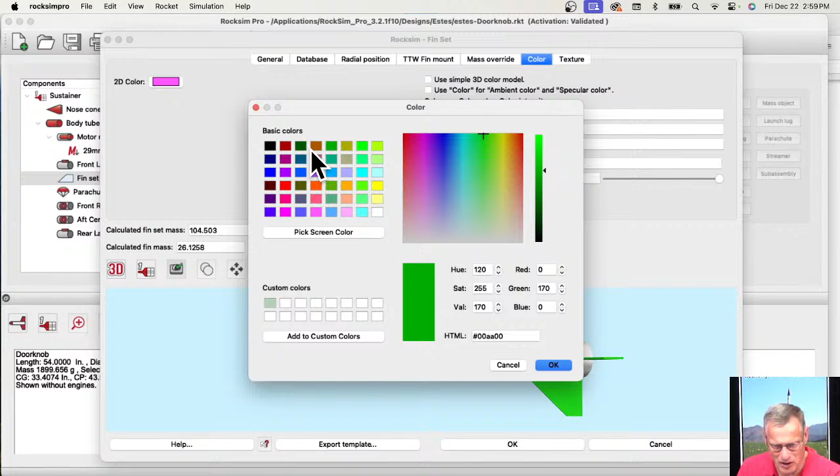And if I change the ambient color... it won't let me click. If I uncheck it, there we go. Let's make it a dark green. Click OK. And then use this... nothing changed. It's light, and then if I click on this one, it should get darker. So I don't know if that answered your question, Mark, but that's basically how to change colors.

Like I said, just use simple 3D. It's more accurate.

Alfred Indy says, get that Catalyst in stock, and one is sold.

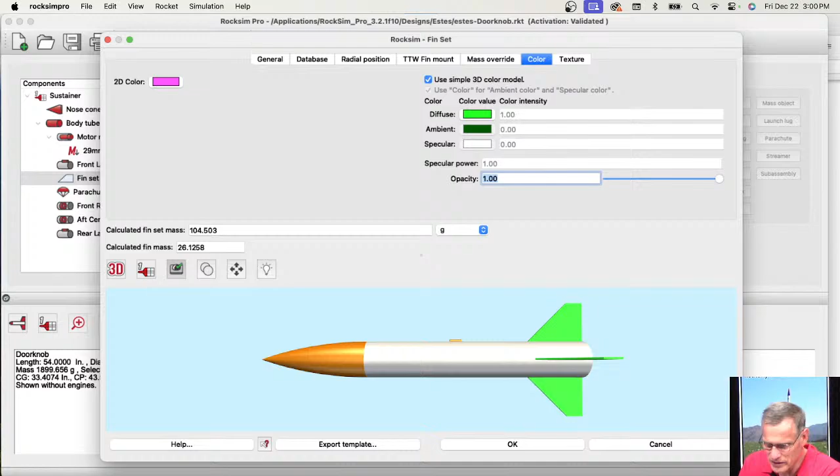Yeah, so it'll be available on Tuesday. We got to build them first, and they're building them right now.

Hugo BG06 says, Tim, I have a question. I've been following the channel for a while, and I'd like to start making rockets. If I understood you correctly from your website, you do not deliver to Europe. Well, we don't deliver anywhere. We ship. We don't deliver.

This is a semantic issue with me because people always ask me if we deliver. We don't deliver. Delivering means that I would take it, put it in my car, drive to your house, and hand it over to you. That's delivery. We ship. So we put it in a box, we hand it off to somebody else, and then they do the delivery. But we do ship to Europe.

The exception is non-hazardous materials only. So we can't ship rocket motors or igniters, but we can ship everything else on our website. If you wanted this body tube right here, we can ship it to you and it would be delivered. If you wanted a rocket motor, that's a problem. We can't ship those outside the United States.